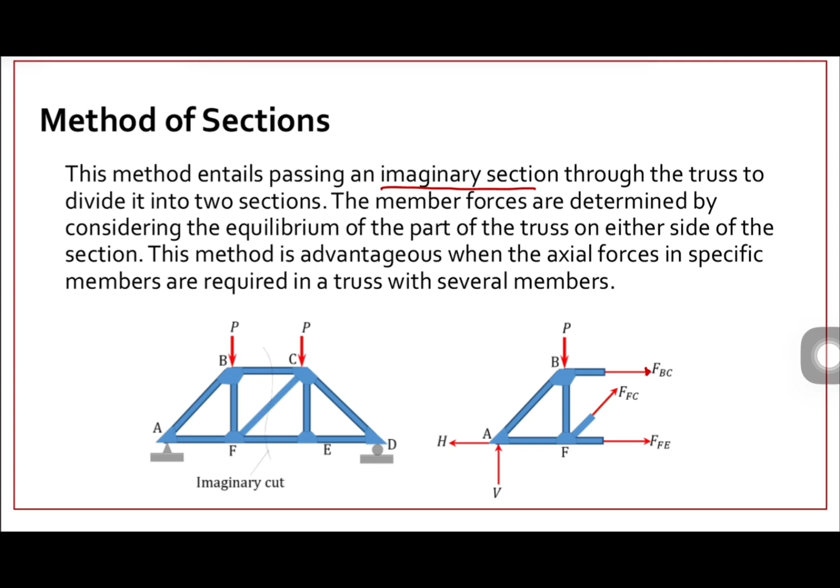This method is called method of sections because it entails passing an imaginary section through the truss to divide it into two sections. So let's say we have a truss here.

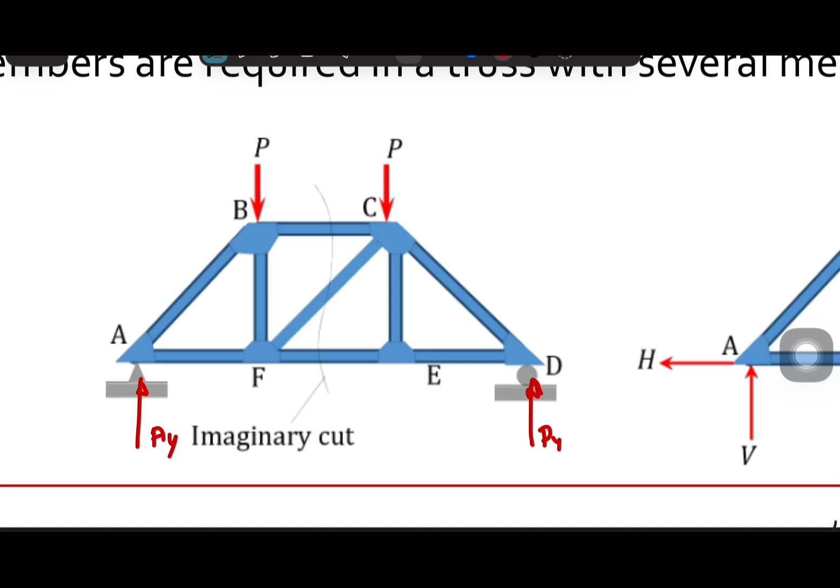So let's continue. Let's say we have a truss here. Usually if we use method of joints, we will try to solve for the reactions Dy, Ay, and of course we have the Ax. And then let's say we are trying to solve for the member FC.

In our method of joints, we will solve first AF or AB, and then continue in these joints, in this joint B. So we can solve for BC and then BF. Once we have BC and BF, punta tayo sa point F, then we can solve for the FC. So this is a very lengthy process for us to solve for the FC.

But using this method of section, if we are solving for member FC, we can just create an imaginary section line here. Once we have created this imaginary section, just like in your plans, we can isolate this part, or this part, if the imaginary section is like this. So isolating this left side can be easier for us to solve for this member FC.

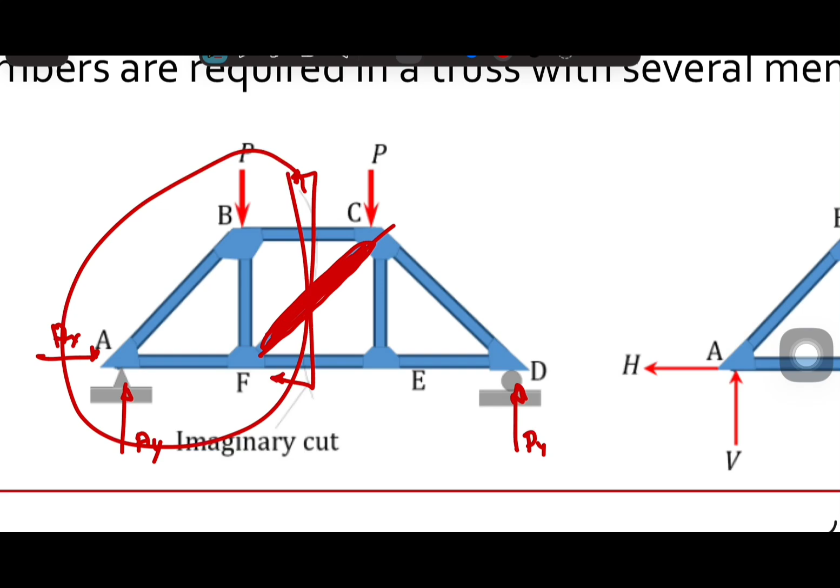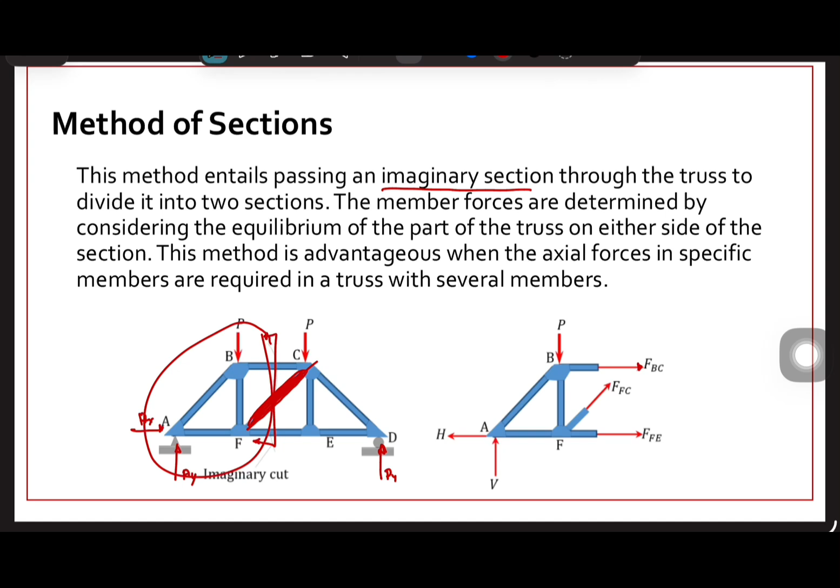The member forces are determined by considering the equilibrium of the truss in either side of the section. Once we isolate this part, those member forces are exposed. So we have FBC, FFC, and then FFE. Since in our previous discussion, we always assume that the members are in tension, kaya away from the point po siya.

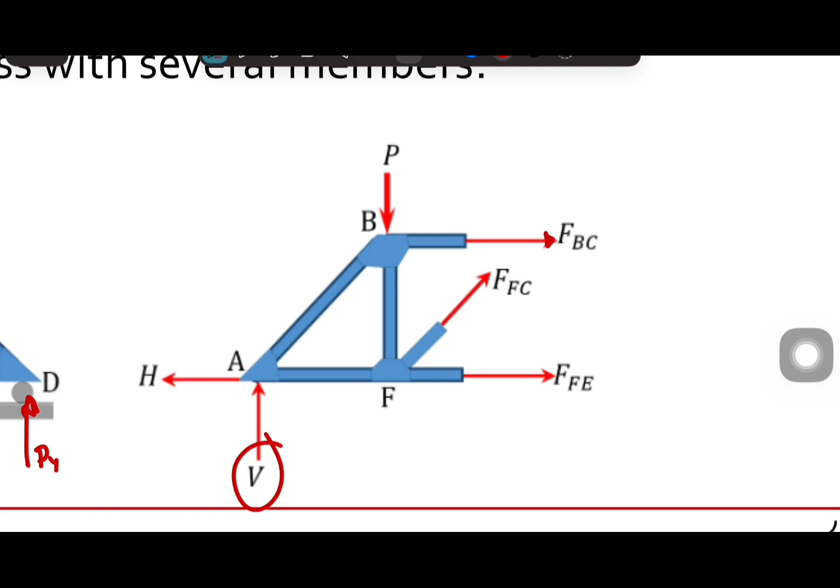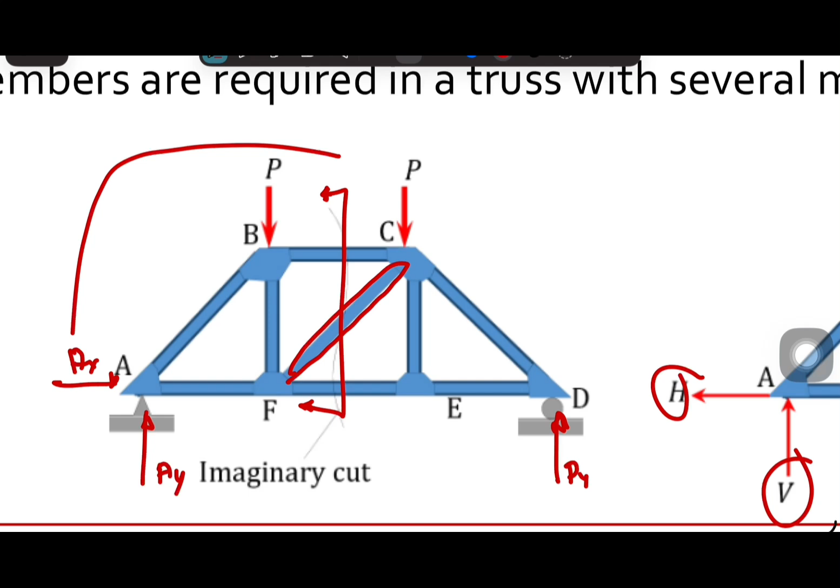Okay, paano siya magiging madali compared with the method of joints? In this part, we have this vertical reaction, horizontal reaction. We also have the point load P. So lahat ng forces o lahat ng part na nasa left side, ayan lang po yung consider natin. All of this part and the right side are not considered.

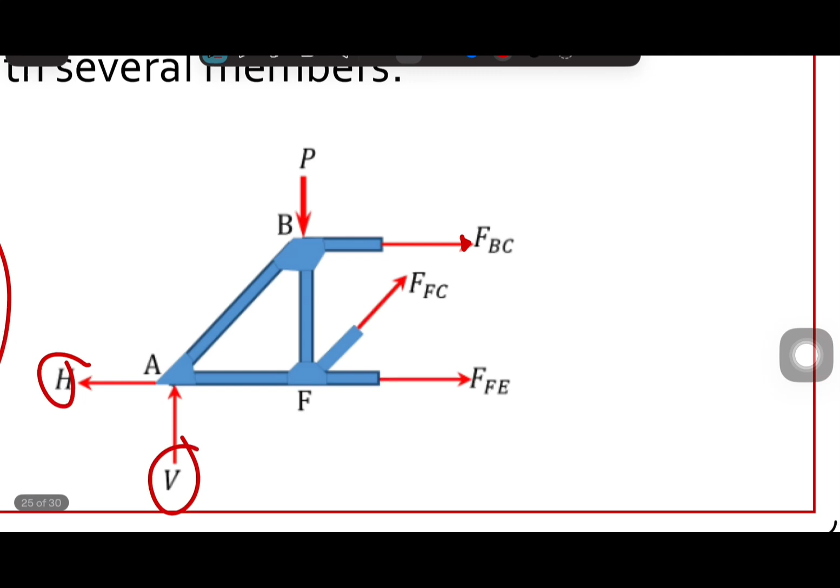So for this one, we can solve for the member using the three equations of equilibrium. We have the summation of forces X, summation of forces Y, and then summation moment. So we can already proceed by using these external forces to solve for the member forces. Since we have three equations for three unknowns, we can use these three equations to solve for these three unknowns.

This is very advantageous, especially if your truss has a lot of members. So if we are trying to solve just one member or one to three members, napakadali. So this is a very easy method.

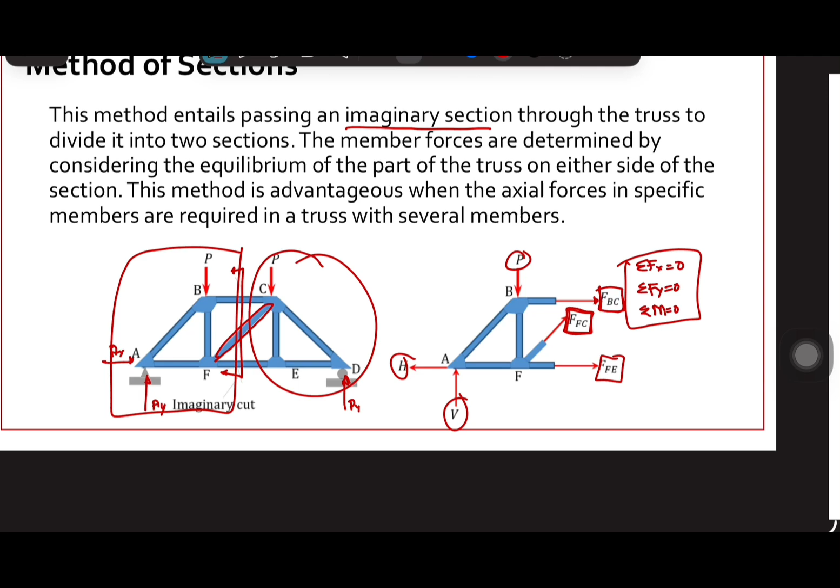Since last time we also had a step by step procedure, we also have here the suggested step by step procedure for the method of sections. Of course, we need to assume that the truss is statically determinate. We cannot solve for this truss if it is statically indeterminate or unstable.

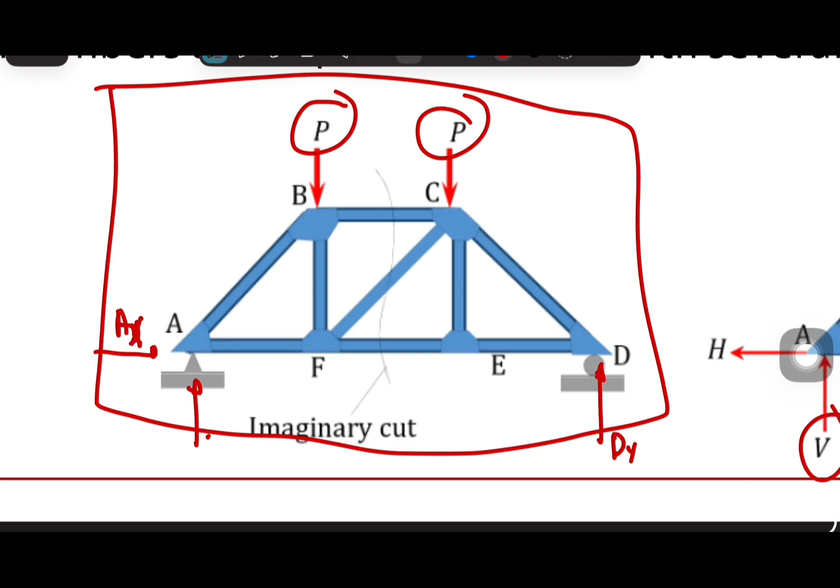The first step is to solve for the support reactions using the three equations of equilibrium. In this case, we are not yet considering the imaginary section. We will analyze first the truss as a whole. Using those external forces, we can solve for the reactions Dy, horizontal reactions Ax, and then Ay for the vertical reactions.

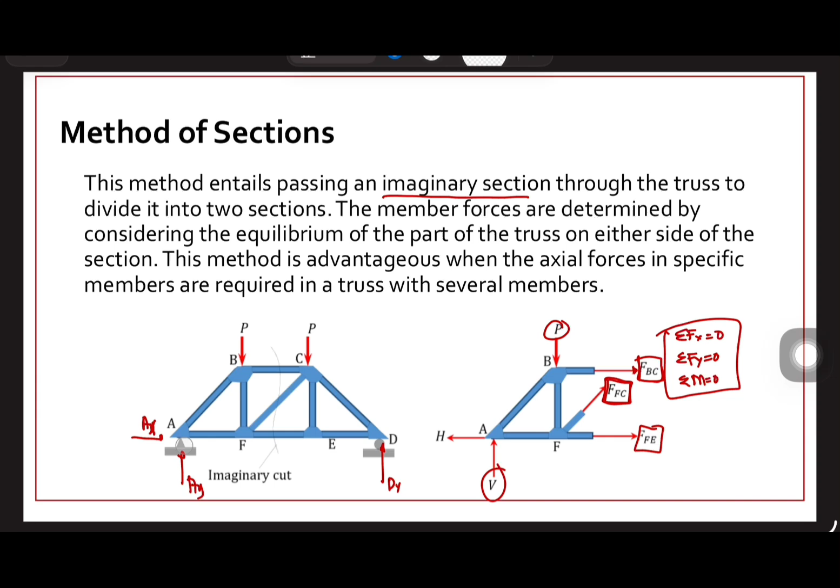Once we have these support reactions, we will draw a section line that cuts most or all of the required members. Assuming that we have these three unknown members BC, FC, and then FE, ideally we can draw the section lines in these directions.

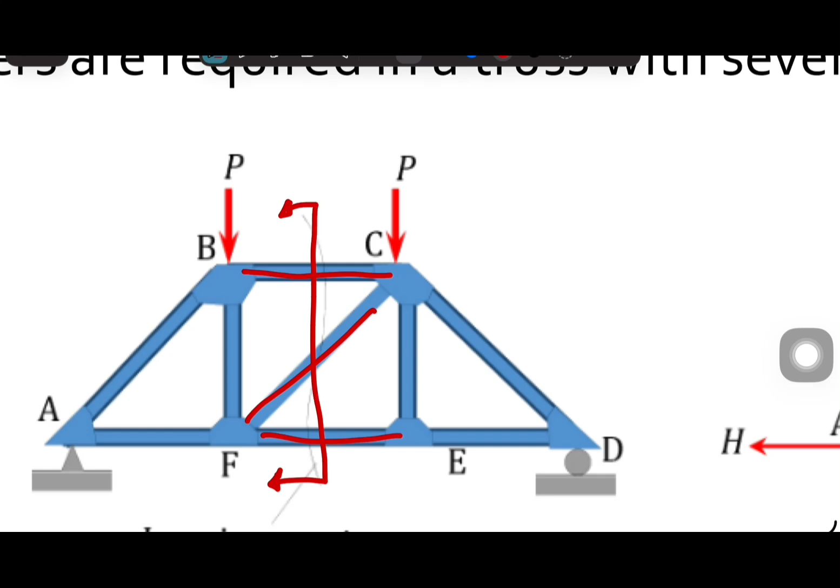Actually, we can add a section line anywhere in the truss. We can add it like this, like this, or like this. But it depends on the problem. If the problem has unknowns of BC, FC, and FE, then this is the ideal cut for the truss.

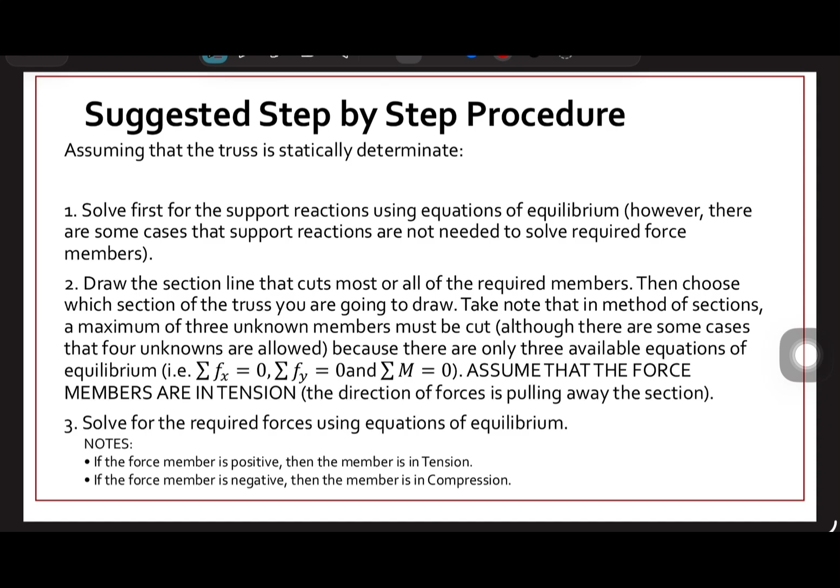You need to take note that in the method of sections, a maximum of three unknown members must be cut. So if your unknown members are four, let's say we have a member here.

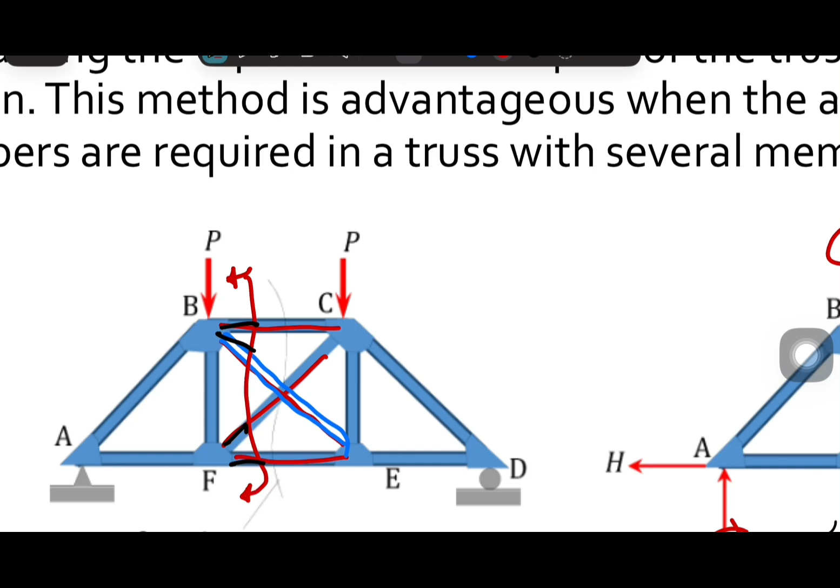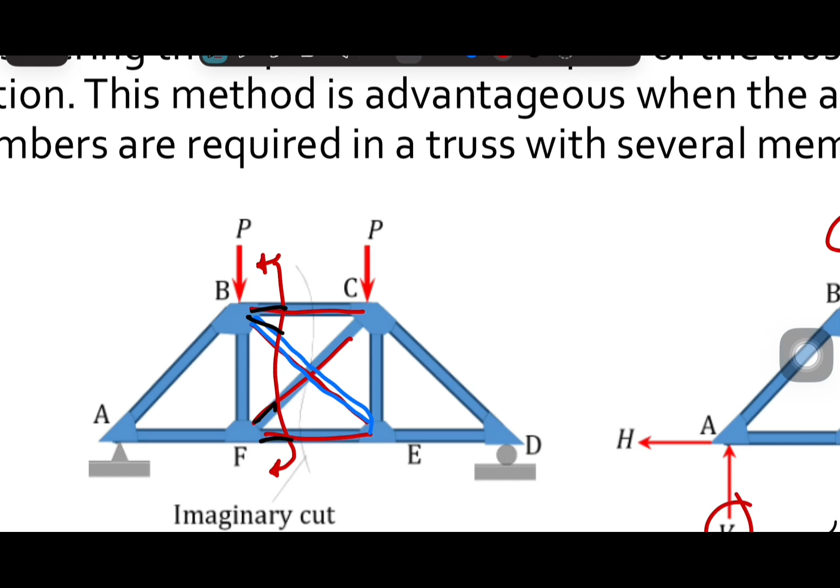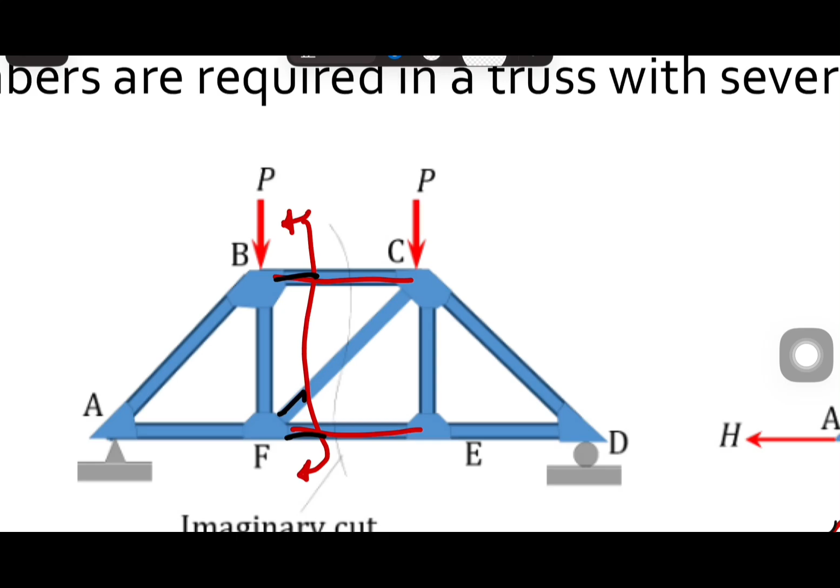So if you cut this section like this, we have four unknown members: one, two, three, and four. There are cases this can be solved using the three equations of equilibrium, but ideally it's not advisable since there's a lot of computation and analysis to solve for four unknowns at once. So ideally, three unknown members is the maximum.

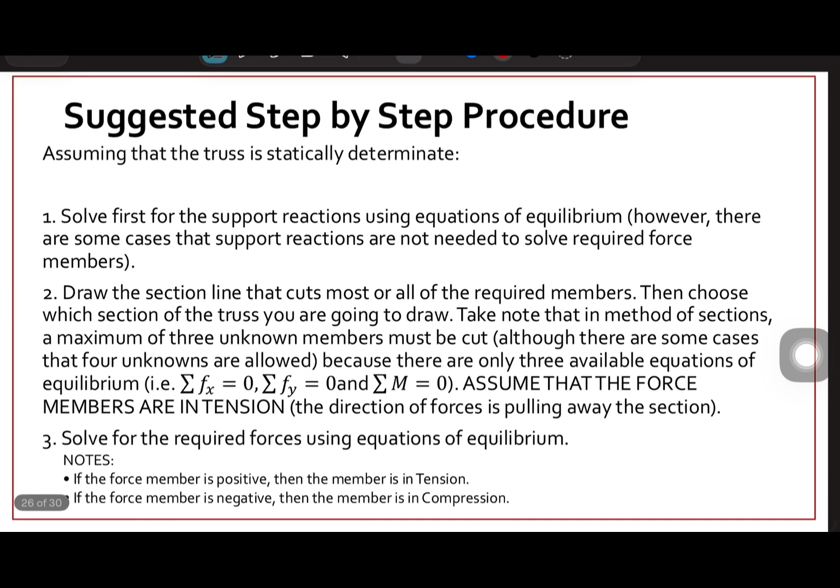And then, of course, we will assume that the forces are in tension. Using the equations of equilibrium, we can solve for the member force just like that. So let's try to solve sample problem number one.

Determine the axial force in members CD, CG, and HG. If you are trying to solve for member DE, DF, and GF, we can consider this cut. Since we are considering CD, CG, and HG, we can cut or draw a section line here.

So before we put a section line, we need to solve first for the reaction. We have the Fy, since this is a roller. Then we have the pin, AX, AY, and then AX.

For the reaction, we only have two external forces, so we can take the summation of moment at point A equivalent to 0. We have Fy times the total length of 9 meters, and then this 80 kilonewton minus 80, we have 3, or no, we have 6, equivalent to 0 since we are in equilibrium.

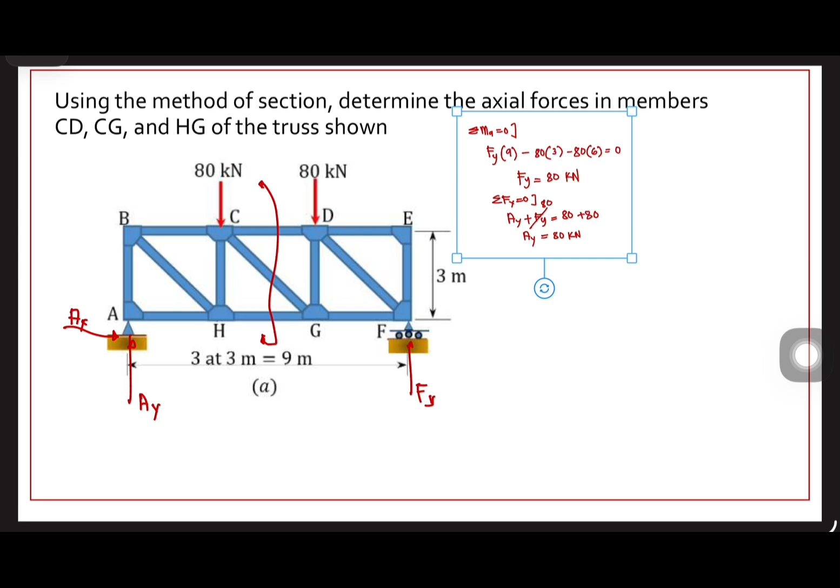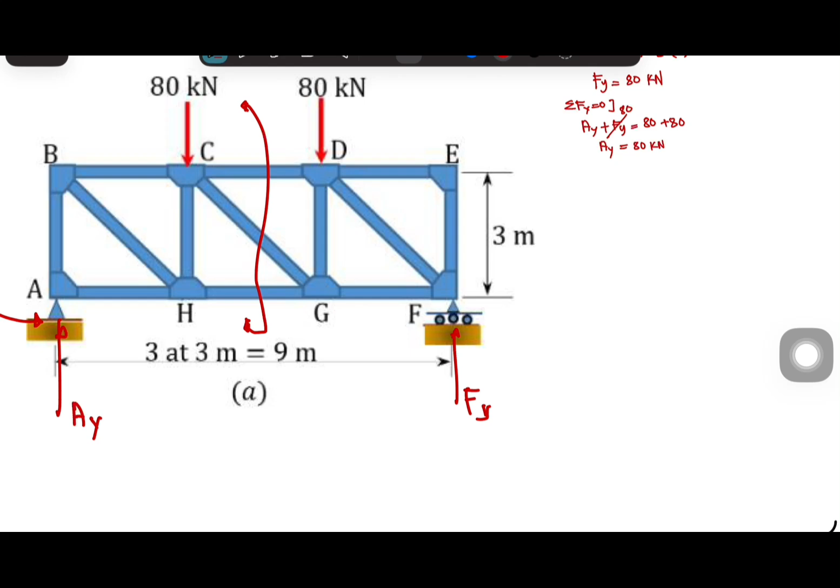Is that clear? So this is just the reactions. Of course, we will draw a section line here, and then we can isolate this left side. I always try to solve using this method, always considering the left side. Drawing the section, we have this one.

This is a pin, so of course we need to consider the 80 kilonewton. Then we have the CG, we also have the HG, and then the CD. And of course, we have the 80 kilonewton. So there are no external forces left, and then we have this 3 meters and then 3 meters.

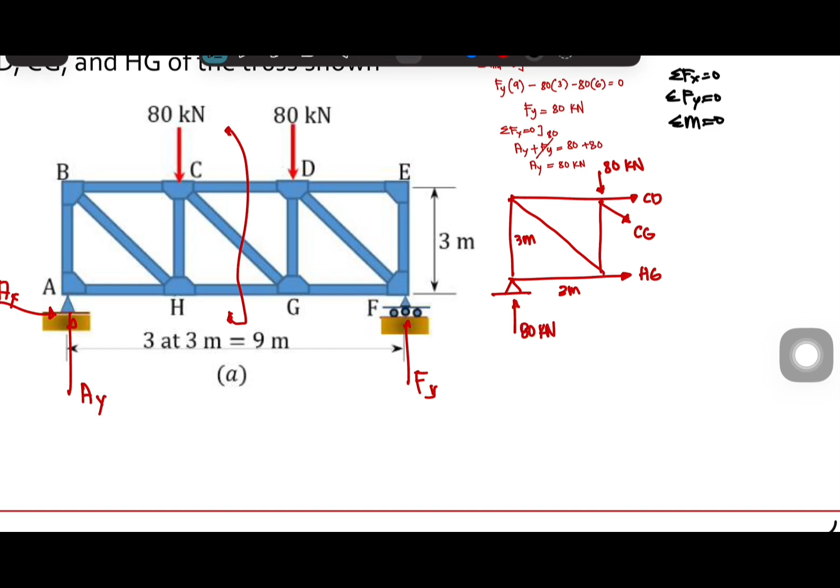We can try to solve for the members using the three equations of equilibrium. Usually in this method of sections, we use summation of moment to cancel out those forces, for example.

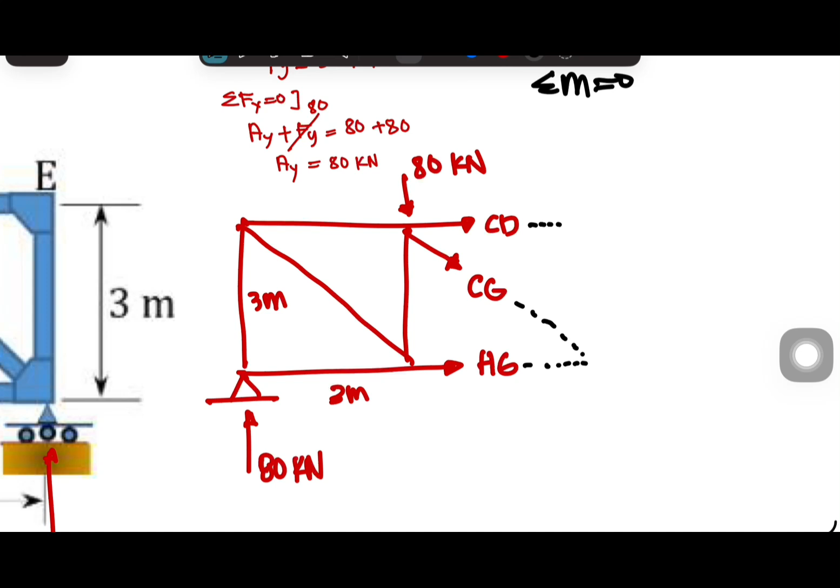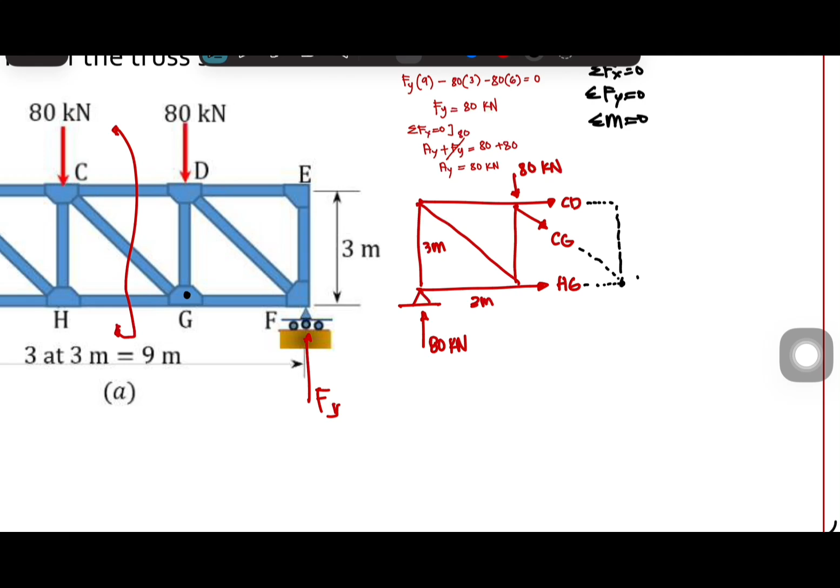Let's try to extend, but we are also considering this one. We can take a moment at point G, this one is point G and then point D. We can try to take the moment here at point G, and then these forces can be cancelled out, since the line of action of these members are pointing at point G.

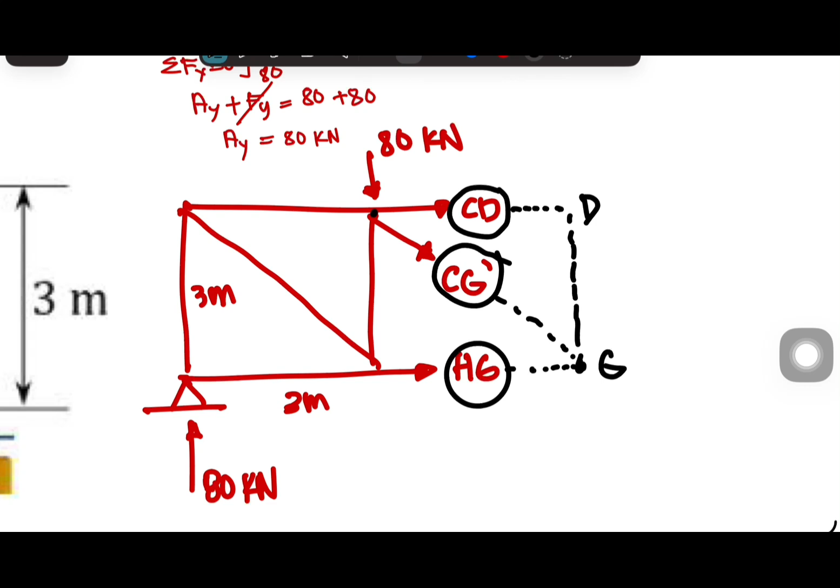We can also try to have a moment here at point C. So having a moment here, we will cancel out these two members, and then we can have only this one member unknown. Let's try to solve for this one.

Let's try to solve at point C. At point C... actually, this is not a joint. So we have summation of moment at C. We take the moment where two members can be cancelled out. Like at point G, two get cancelled out immediately. Same at point C, two also get cancelled out immediately. So at point C, we only have two members that can be considered since the 80 is acting at point C.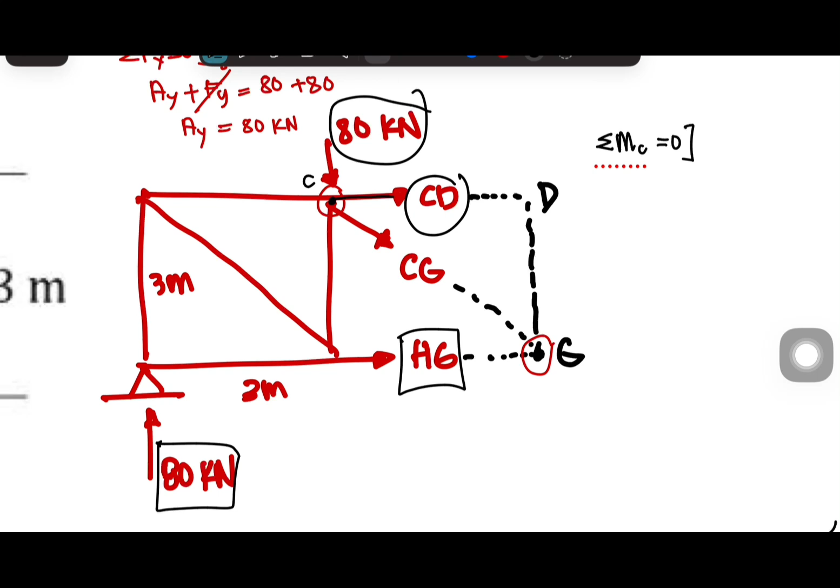The CD comes from point C, and CG comes from point C. So for this one, don't get confused with the direction. For CG, we can assume the counterclockwise direction. For HG, we have this direction, so this is counterclockwise. So HG, positive, and the distance is from here to here, so we have 3 meters.

Next, we have the Ay. The direction of the Ay is clockwise, so we have a minus 80. But the moment arm is from here to here, so we also have 3 meters. This is equivalent to 0 since we don't have any external force left.

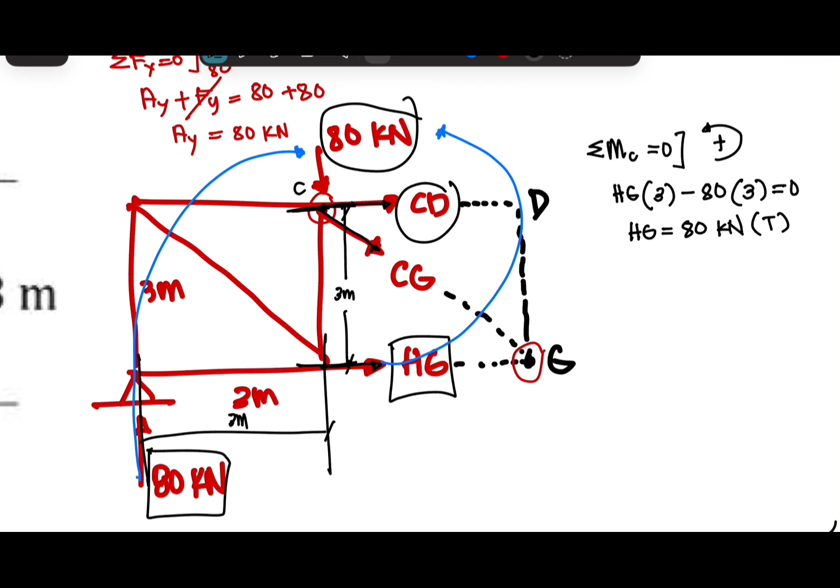So for the HG, we have this equation that is equivalent to 80 kilonewton, positive. This is in tension. Next, since we have this HG...

We can also take a moment here at point G, and then these two will be cancelled out. The CD will only be the unknown for this moment. So summation of moment at G equivalent to 0, and of course counterclockwise again so we are not confused with the direction.

Let's erase this one since it's very messy. Also, let's consider the moment arm.

So having a moment at G, this member force will coincide or point in the direction of point G, so of course this will be cancelled out. So the remaining unknown is CD.

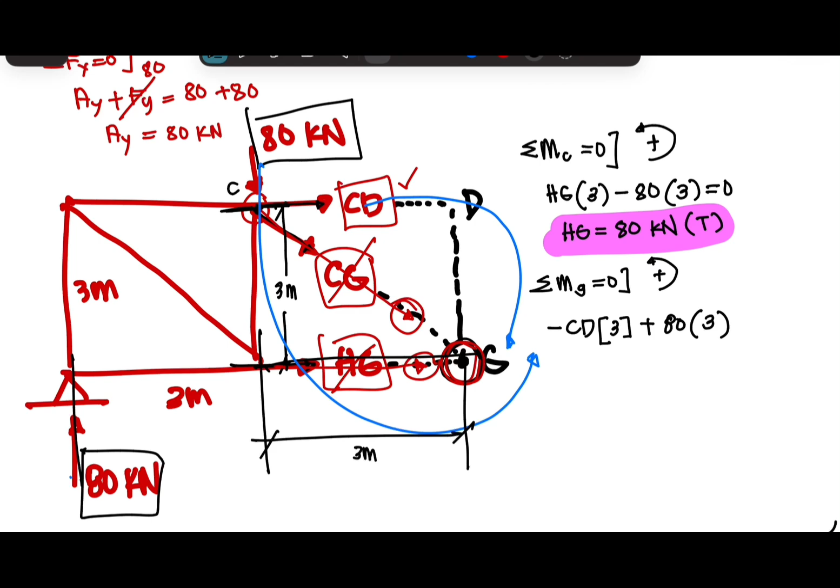And then lastly we have the reaction 80. The direction of this one is the same as CD, which is minus 80 times the moment arm, which is 6 meters.

So negative CD, or CD is equivalent to 80 times 3 minus 80 times 6, divided by 3. We have negative 80.

Kilonewton. CD is negative, so let's try to rewrite it as 80 kilonewton, but this is in compression. Is that clear? Let's try to highlight this one.

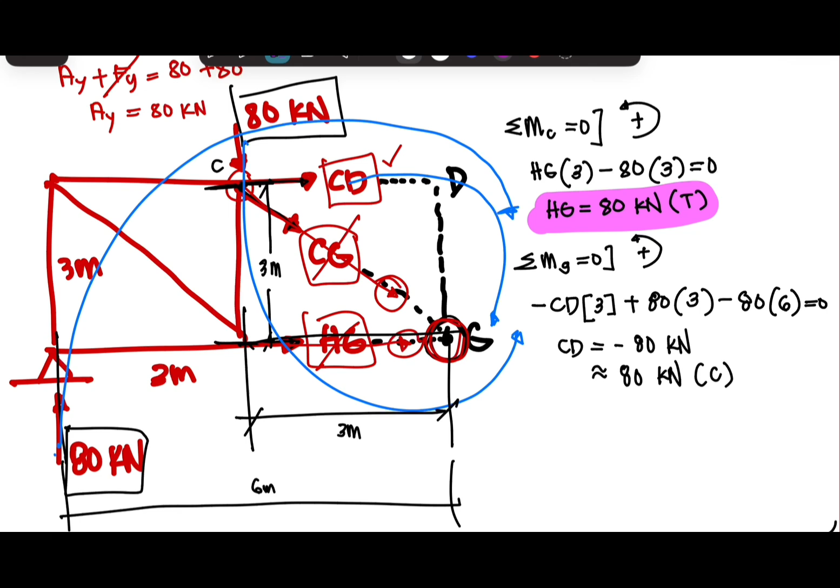Let's erase the directions and other writings.

All right, you can also use summation of forces vertical. Using summation of forces vertical, we have 80 and then CG. Let's try to solve for this one.

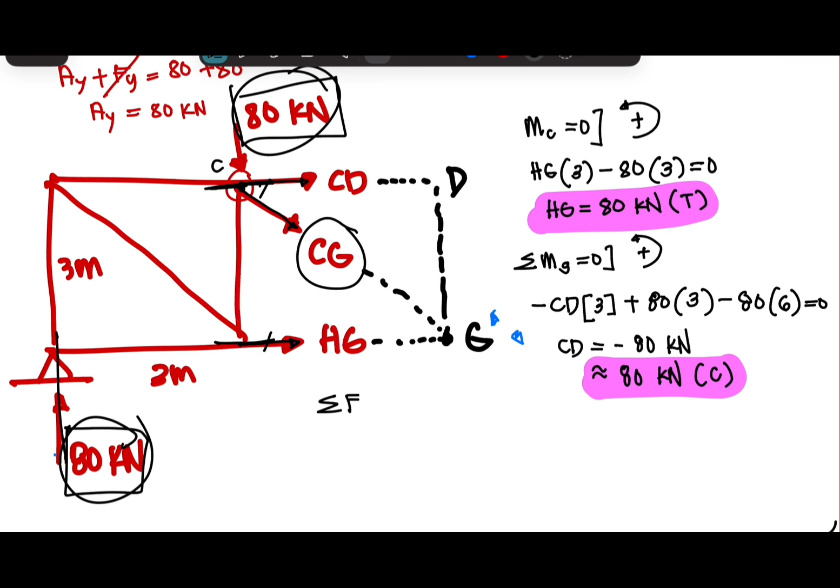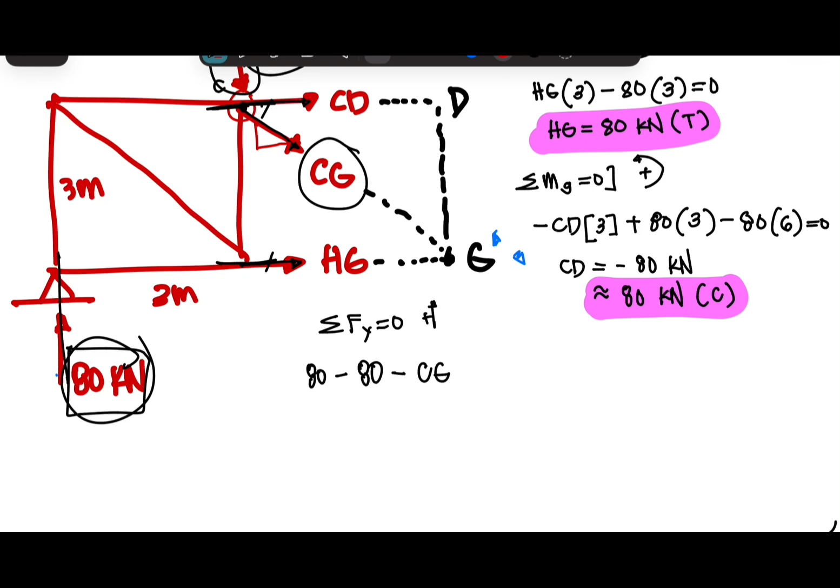For this one, summation of forces y is equivalent to 0. So we have downward CG, but let's do 80 upward first, minus 80 downward, and then minus CG downward. But since this is a diagonal member, we have a side slope of 3 and 3.

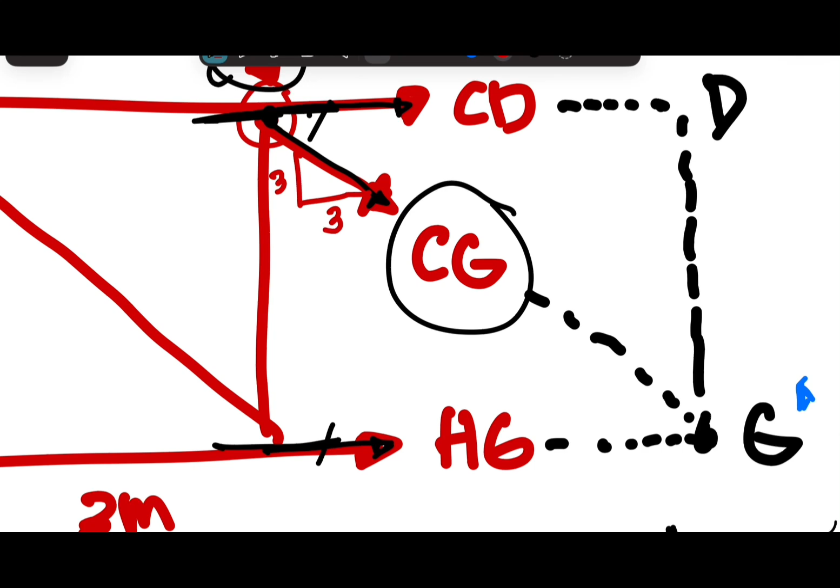So for the hypotenuse, we have 3 square root of 2. So for this one, you can write the slope as 3 over 3 square root of 2, and this is equivalent to 0.

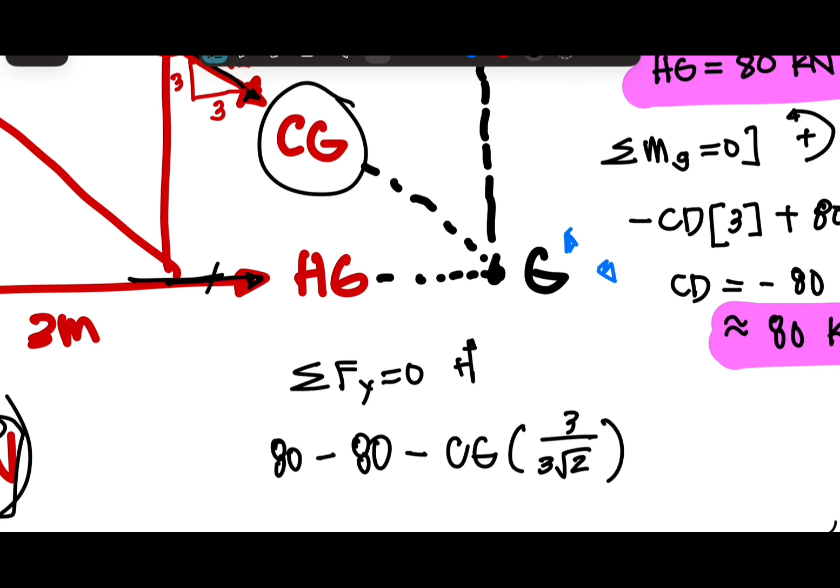So for CG, we have 80 minus 80, and this will be transferred to the left side. 80 minus 80 is equivalent to 0, so this is also equivalent to 0.

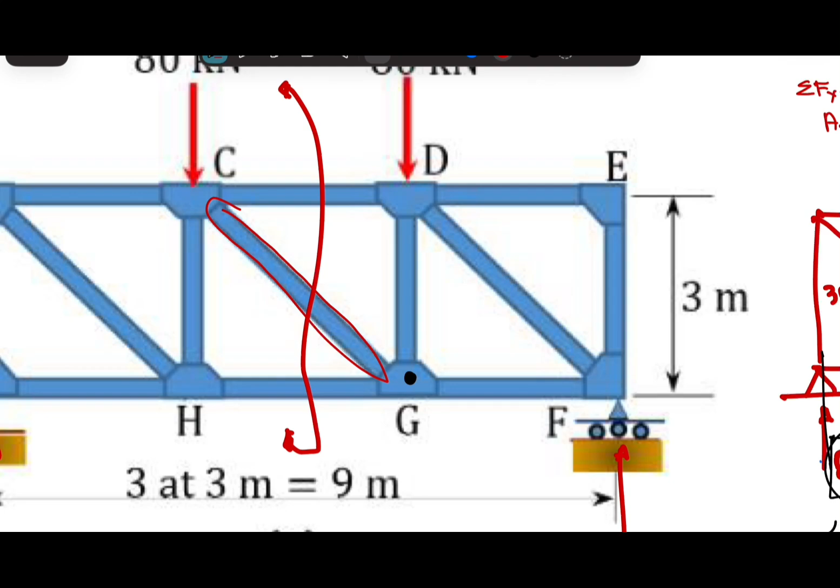Let's try to solve for another example. We have this truss, and we'll try to solve for the forces marked X. We have DE, NE, and NM. So of course, let's try to solve for the reaction first.

We have AY. Since we don't have any horizontal force, no need to consider AX. We will proceed with JY. For us to solve for this reaction, let's take a moment at point A.

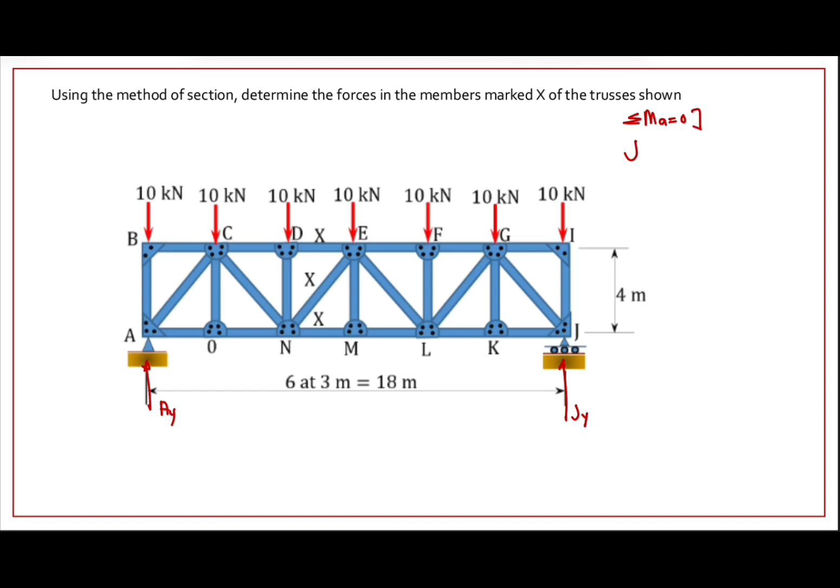We have JY, counterclockwise positive, times 18 meters, minus... we only have this one. We will not consider this one since it is directly pointing at point A, so no need to consider this one.

So we have 10 times 3 meters minus 10 times 6 meters minus 10 times 9 meters minus 10 times 12 meters minus 10 times 15 meters minus 10 times 18, equivalent to 0.

So we have 10 times 3 plus 10 times 6 plus 10 times 9 plus 10 times 12 plus 10 times 15 plus 10 times 18, which is 630, divided by 18, we have 35. JY is equivalent to 35 kilonewton.

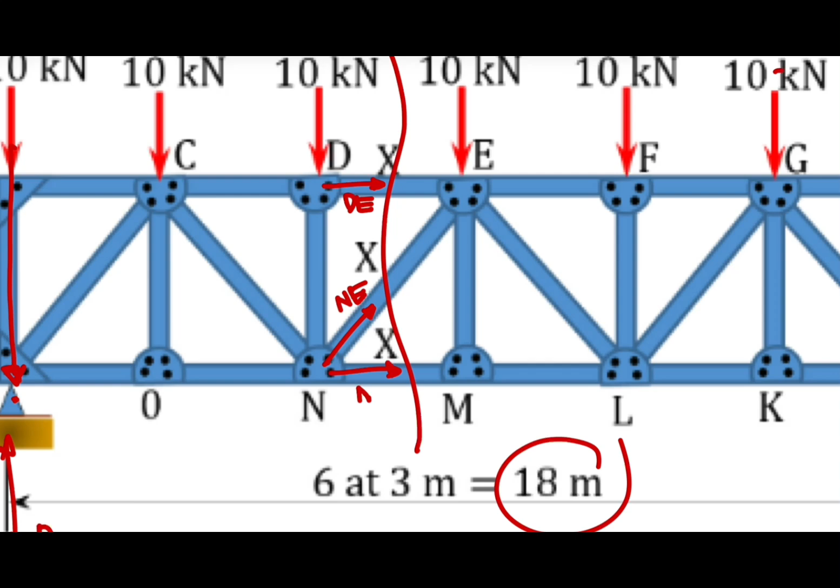DE, NE, NM. Let's add an additional page after blank. So the beam is just like this.

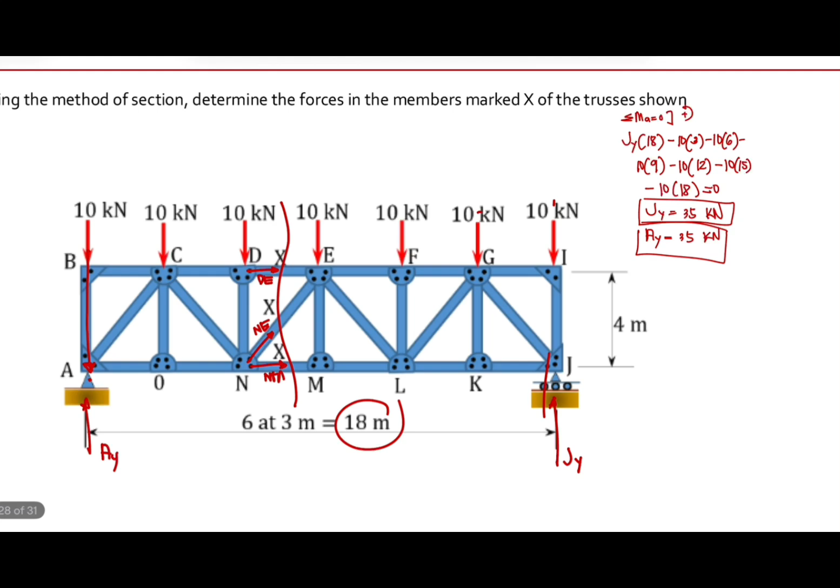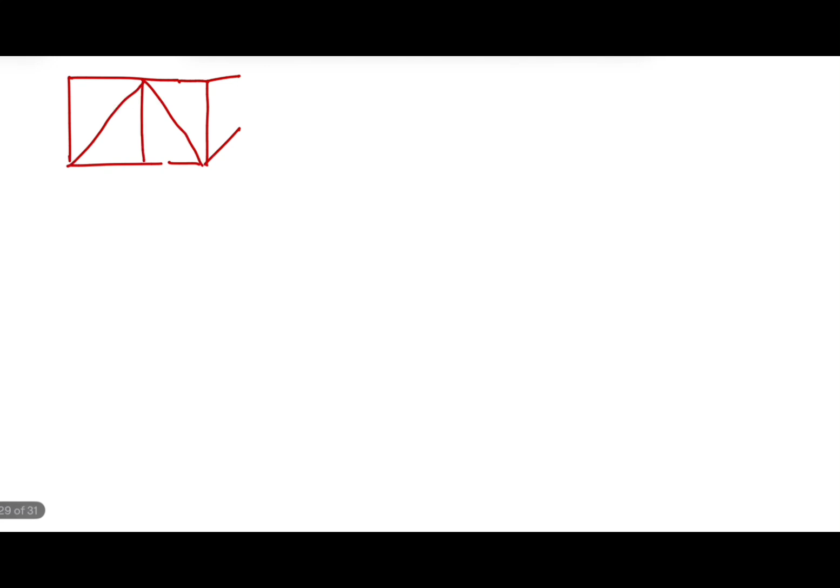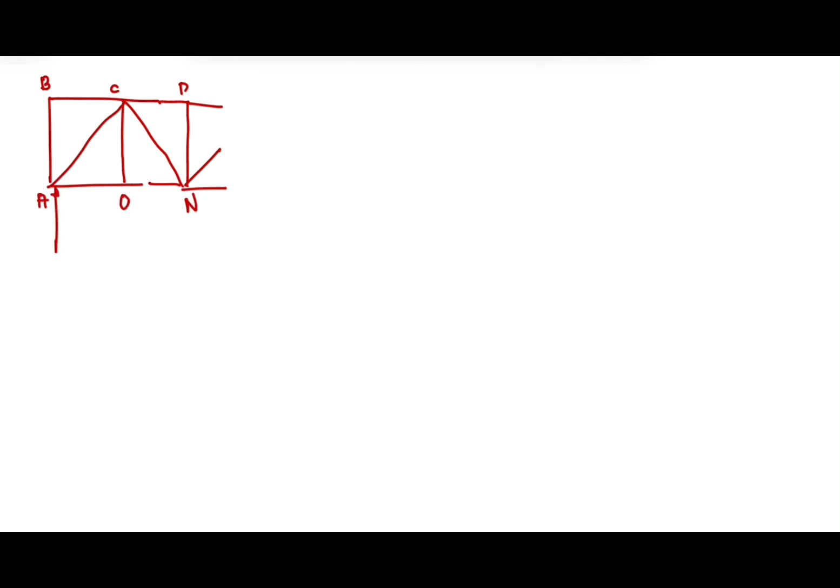Okay, we have here 35. And then 10, 10, 10. 20, we have M. Itong mga dotted line, hindi na siya kasama sa actual, okay? Bali, imaginary na lang din yan. Pero we can have a moment at that point.

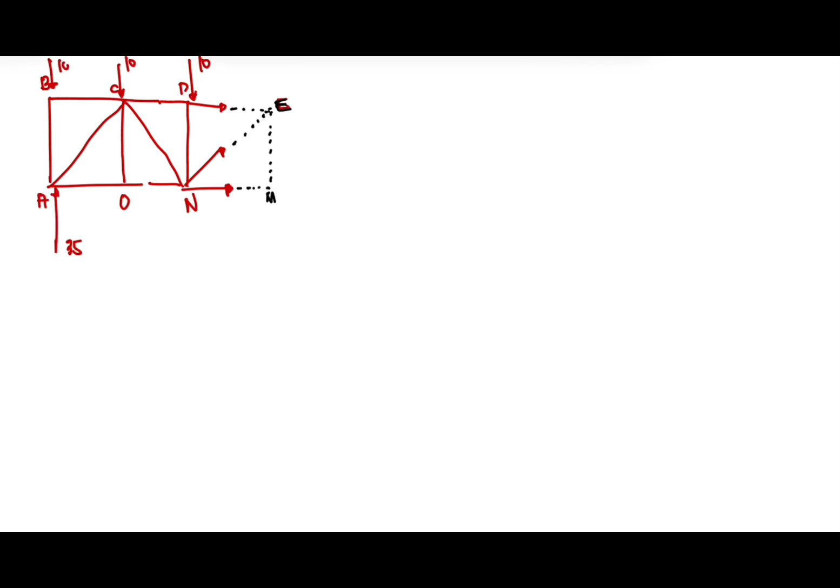Okay, so we have DE, NE, and then M. Again, we will have a moment wherein there are two unknowns that can be cancelled out. So, in this case, pwede tayong pumili at point E. Ito yung mawawala. We have the DE kasi papunta siya dyan, and then NE kasi papunta siya dyan. Aside from E, we also have N. So, in this case naman, yung NE galing sa point N and then yung NM is galing sa point N. Ma-cancel out ulit yung dalawa.

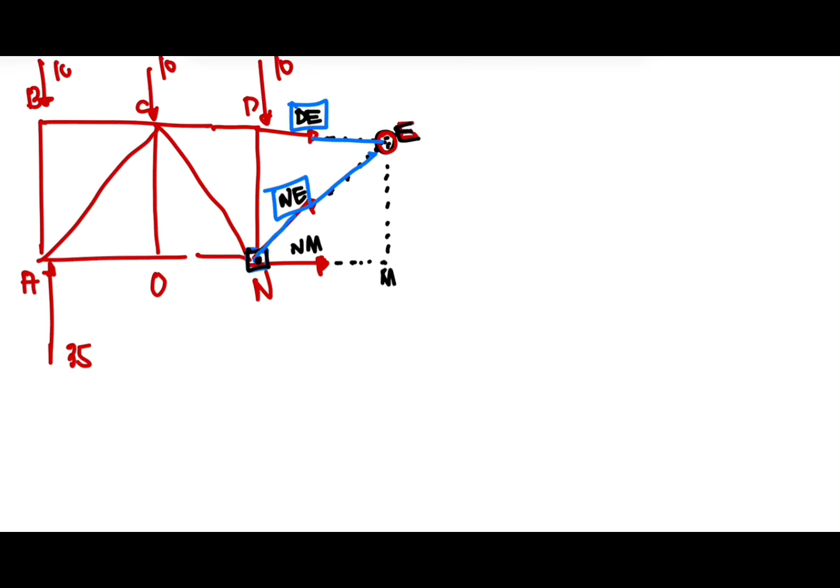So, let's try to have point N. Summation moment N equivalent to 0. Okay, ito 3 meters, 3 meters. And then yung height is also, no, this is 4 meters. So in this case, ma-cancel out po yung dalawang forces na to.

Okay, ito, so matitira lang is DE. We have 35 and then we have tatlong 10. So in this case, unahin natin yung DE. So yung direction nito is ganito, so counterclockwise, positive. So DE is equivalent to, or the direction of this one is pa ganito, so this is clockwise, so this is negative. But the moment arm is equivalent to 4 meters.

Next is the 35. 35 direction is ganito, it is also clockwise. Okay, so this is also negative. So we have 35 kilonewton, but the moment arm is equivalent to here, dito, galing dito, we have 3 plus 3, we have 6 meters.

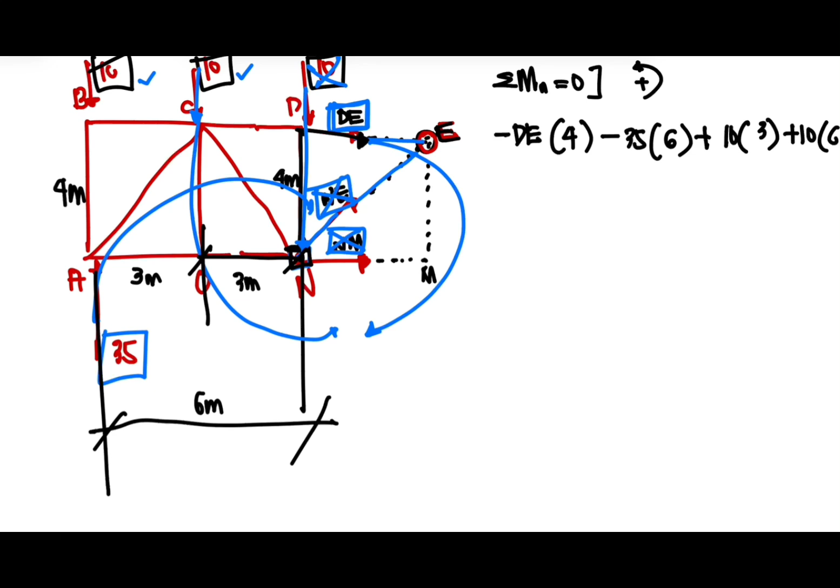Okay, next we have 10. Itong 10, kasama po yan, sa external force yan. So itong unang 10, along siya dito sa point N, so this will not be considered. Pero itong dalawang 10, hindi na siya along point N, so yung direction naman nito is pag ganito na, this is counterclockwise, so this is positive. We have 3 meters, kasi galing dito hanggang dito. Then we also have plus 10, but this is 6 meters. This is equivalent to 0.

So for DE, we have 30 plus 60 minus 35 times 6, negative 120 divided by 4, we have negative 30 kilonewton. So right natin, we have 30 kilonewton, but this is in compression.

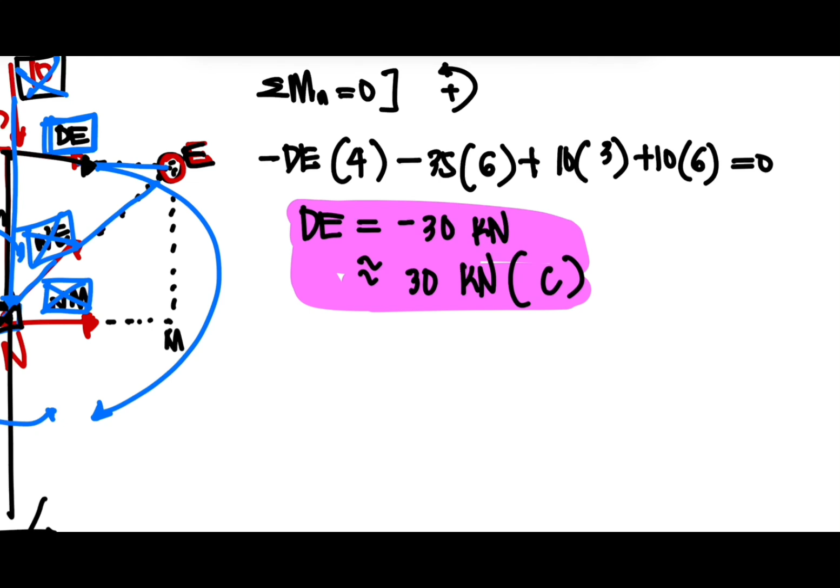Okay, so is that clear? Erase natin yung mga direction na yan. You can just screenshot.

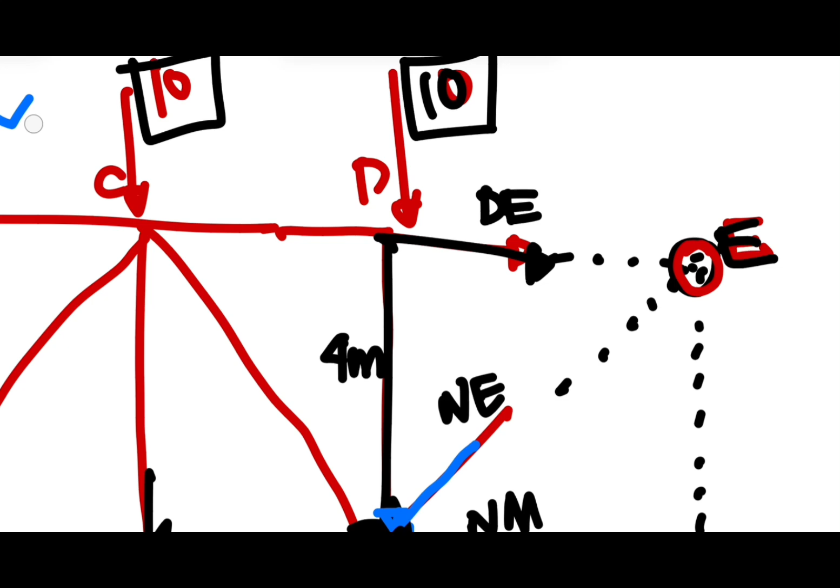So next would be, we are done with the DE. Yun na tayo dito with DE. We can solve for the NM and NE.

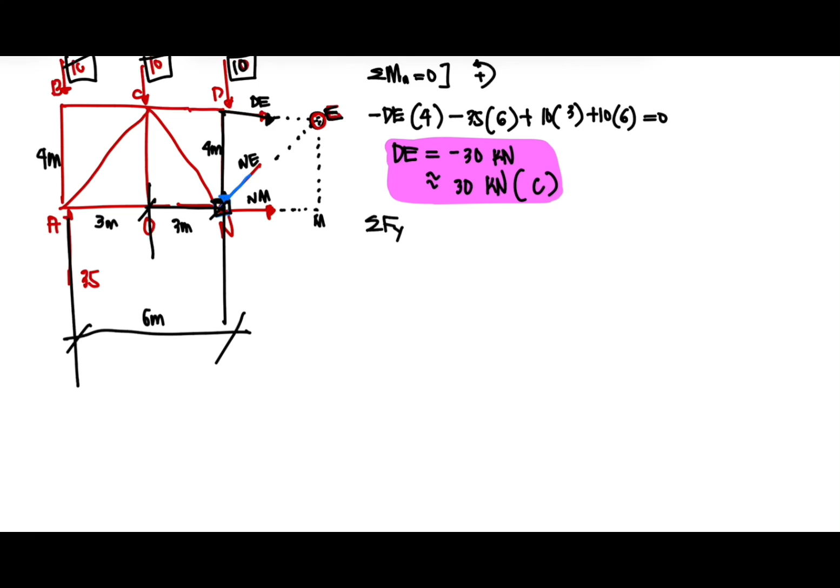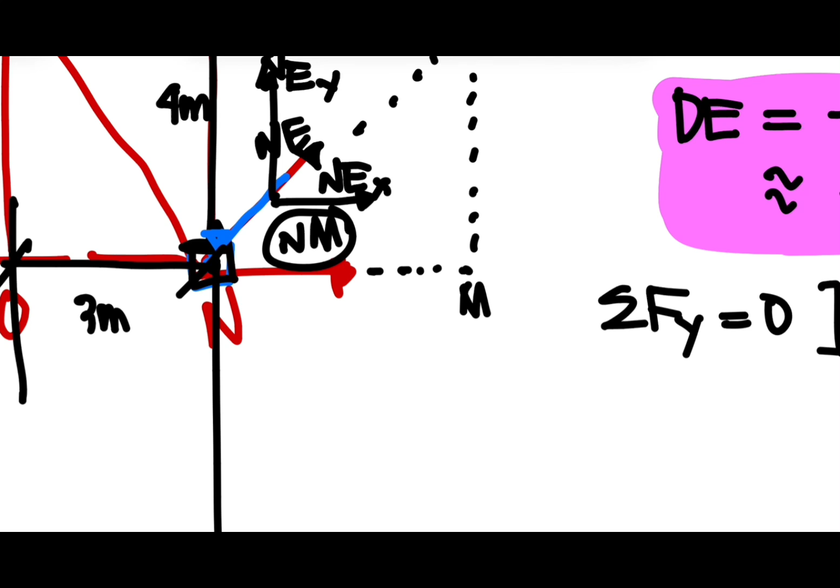Sa NE, we can use summation forces Y. Okay? Kung summation forces X tayo, dalawa yung unknown. We have NE horizontal, tsaka NM. NEX, dalawa kasi yung component, NE Y. So summation forces Y muna tayo, para NEY muna yung consider natin.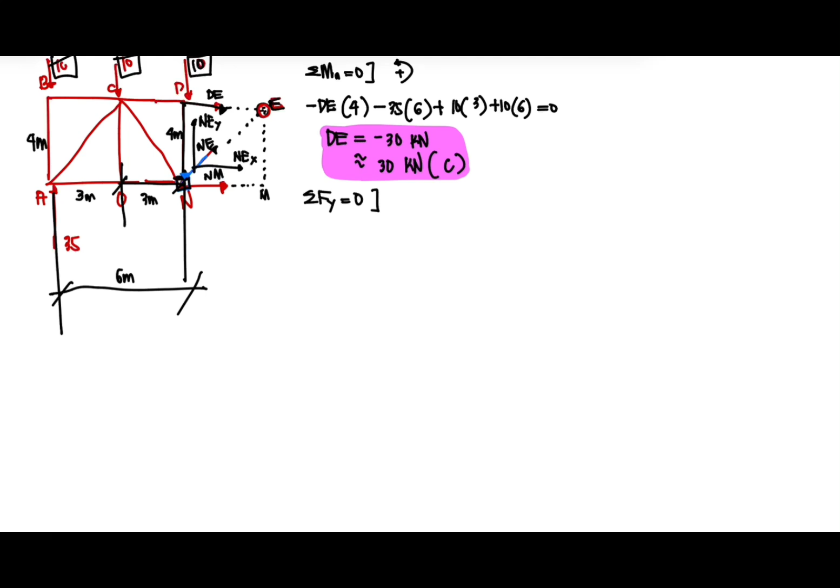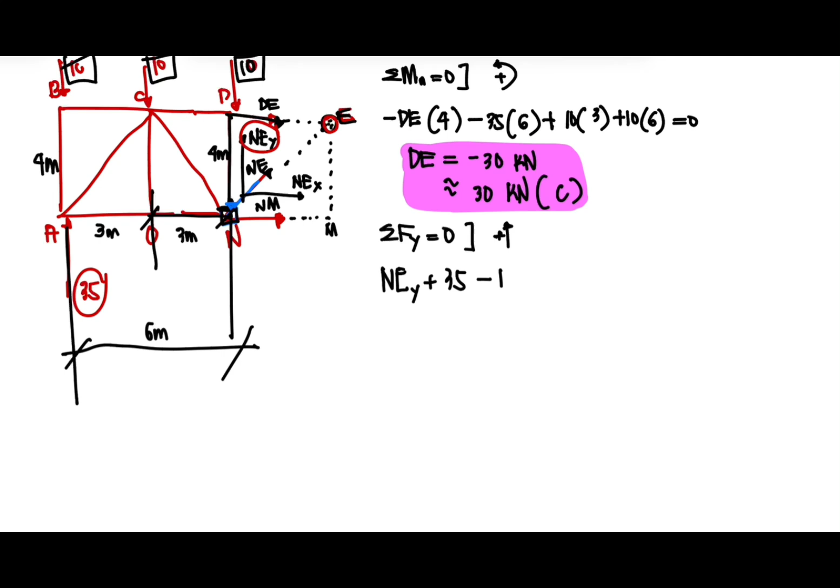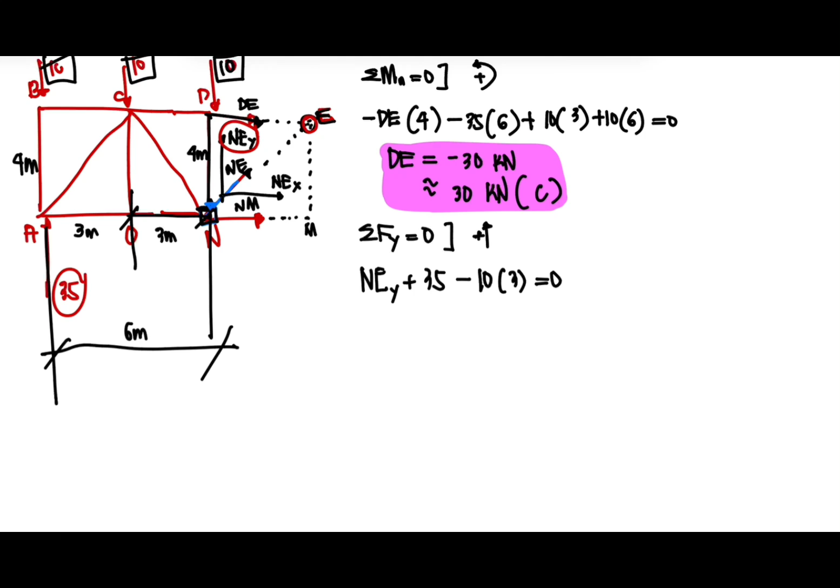For the summation forces Y, ito yung mga forces. We have 35 and NEY, tatlong 10. Upward, positive. NEY is positive plus 35 minus tatlong 10 or 10 times 3, tatlong 10, kaya 10 times 3. Papalitan na naman kaya. So, NEY is...

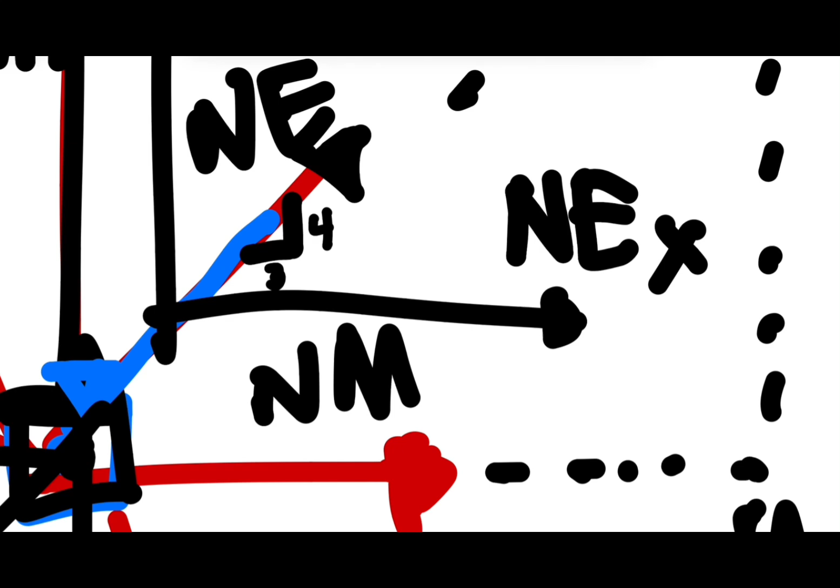Palitan natin yung NEY na yan ng NE. Yung slope nito is equivalent to, this is 3, ito naman is 4. So 3 squared plus 4 squared is equivalent to 5. So this is a 3, 4, 5 slope. So kino-consider natin is y, so we will use 4.

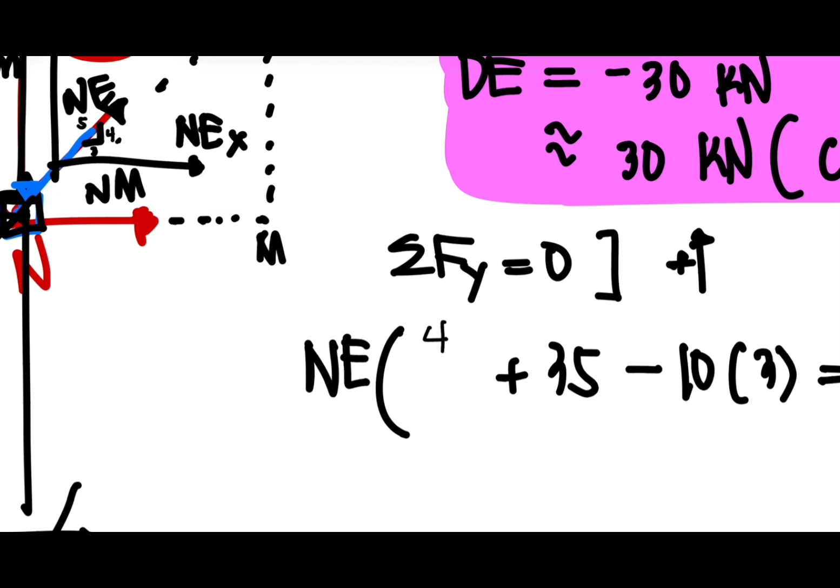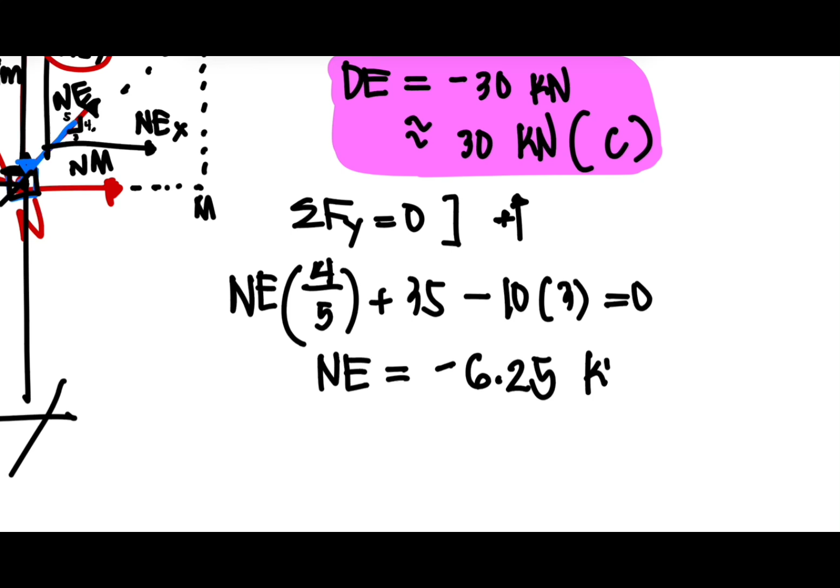4 over 5. For NE, we have a value of 30 minus 35, negative 5, times 5 over 4. We have 6.25, negative 6.25 kilonewton. So since this is negative, we have 6.25 kilonewton in compression.

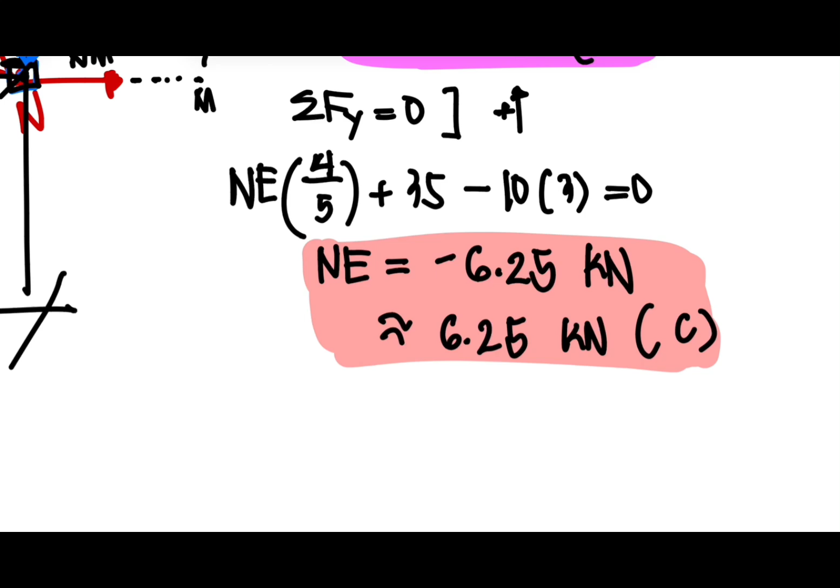And then lastly, we have the NM. For NM naman, we can use summation forces X. So we don't have any additional summation forces or forces in X direction. We only have DE, NEX, and then NM.

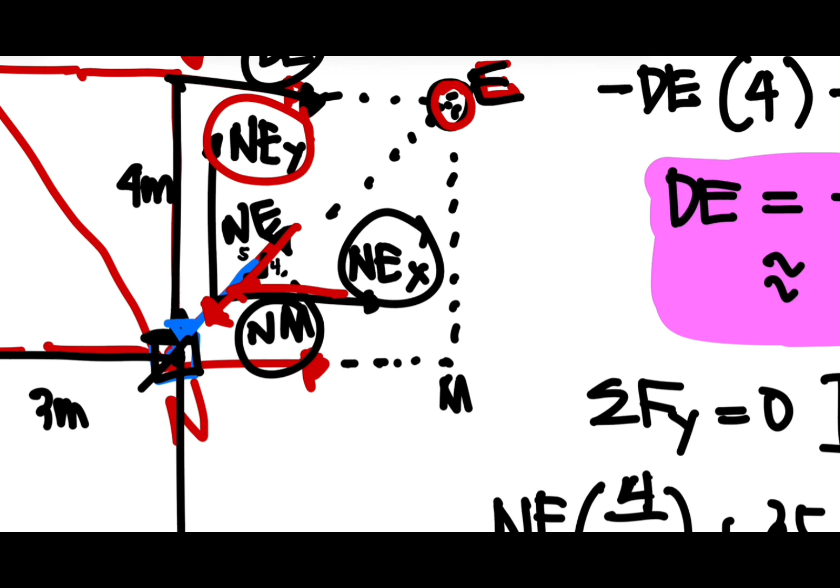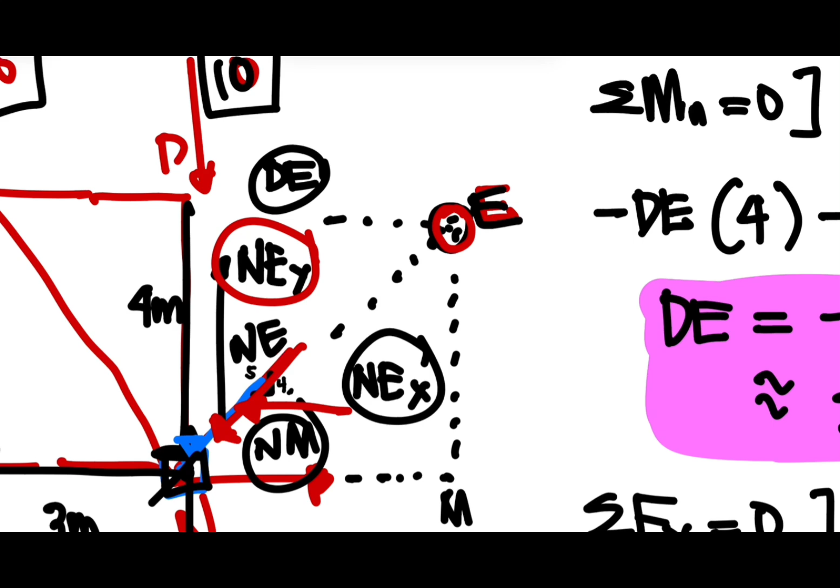You can use that one. NE, compression na po siya, no? So ibig sabihin, papasok na po siya, pag ganito na siya. So this one is also to the left. Erase ko na tong mga to. And then ano pa yung negative kanina? DE. So this one is also in compression. And NM na lang yung assume natin na compression.

To the left, positive NE, X plus DE minus NM. NEX is 6.25, 3 over 5, plus 30 minus NM. NM is equivalent to 6.25 times 3 over 5 plus 30. We have 33.75 kilonewton. This is the final answer for this problem.

By the way, this is positive, so this is in compression.